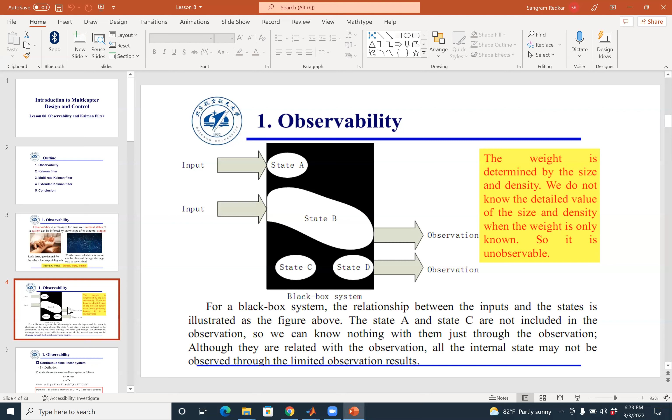For example, if they give you the velocity, you try to find out what the position is. If they give you the acceleration, you try to find out the velocity. By integration, double integration, you can find the displacement.

At minimum, this is the standard form of the continuous time differential equation system. This is the first order representation we studied in Robotics 1, where x dot is the first derivative of state. A is the constant matrix, X is the state, B is the weights on the control input, and U is the control input. Y is the observation, and that observation is somehow related to the state by matrix C. So when we talk about observability, that matrix C plays a critical role.

In the next few slides, I'm going to show you some examples of practical systems where you can observe the system, and where you cannot. So what is the definition of observability?

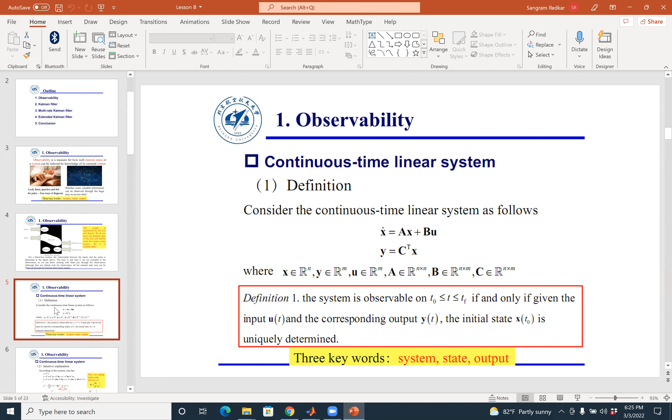I want you to understand something like this. You know y, basically y is given to you. So given y, we have to find x. How do we find that out? y is equal to c transpose x. If you take the derivative, you get y dot is equal to c transpose x dot. But what is x dot? From this equation, x dot is equal to Ax plus Bu.

When you substitute this equation in here, and repeat the process, you get a linear matrix equation. That matrix equation is solvable as long as this matrix has full rank. What do I mean by that? I'll start with a very simple example.

2 oranges plus 1 apple is equal to $6. 4 oranges plus 2 apples is equal to $12. So from here, can you tell me the cost of an orange and the cost of an apple? No, because there are two unknowns, cost of orange and cost of apple, but there is only one equation. Do you agree with me?

If I write this equation in matrix form, remember linear algebra, orange and apple, if you find the rank of this matrix, the rank is going to be 1, but there are 2 rows. So this matrix is rank deficient, and that means these variables cannot be found out.

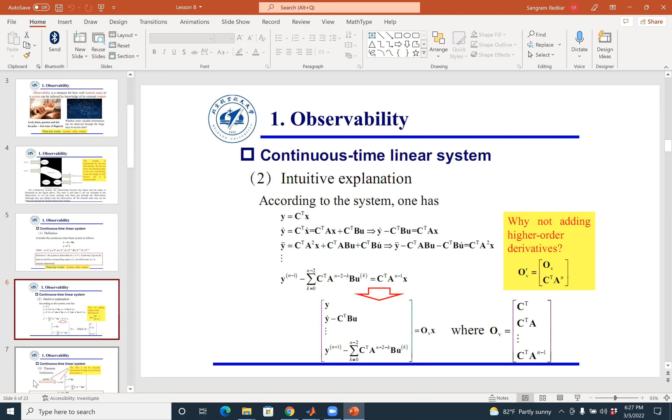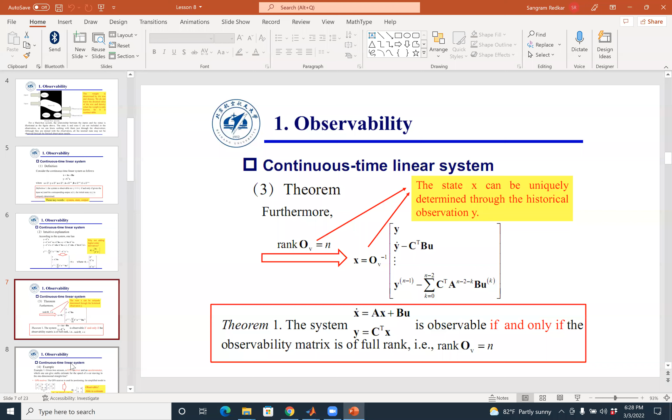Don't believe me? I'm going to show you a practical example, and then a video that will make these concepts clear. This is the basic theorem: the system x dot equals Ax plus Bu, and y is equal to c transpose x. A is observable if and only if that observability matrix, the matrix built from C transpose and A squared, has full rank.

Now let's look at an example. This is a very classic example that is motivating for Kalman filtering and sensor fusion, and this is the example we will see in the videos. Say you have an inertial measurement unit with an accelerometer, and you have a GPS. The GPS gives you the position estimate, telling you where you are. The inertial measurement unit gives you acceleration, and you integrate the acceleration to get velocity. But the output from the inertial measurement unit is noisy. So how do you combine these two measurements, the GPS and the accelerometer, to get an estimate?

Please note, this is not the true measurement, but an estimate for the speed of a car moving in one dimension. The GPS receiver gives us the equation for position. The very simple model is P dot equals 0 1 0 0 times P, and V dot equals 0 times V, plus some type of noise in that measurement. Now the question is: is this system observable?

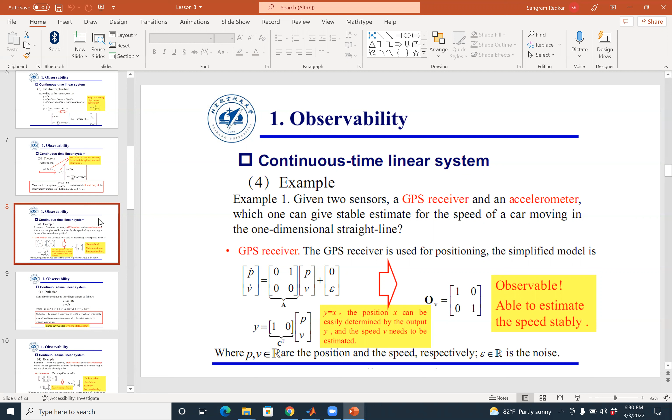The answer is yes, and let me tell you what this means. From a GPS receiver, you know the position. You know the timestamp. After some time, from the GPS receiver, you again know the position and the timestamp. So you have two positions and two timestamps. Can you find the velocity? You can find the velocity. So that's what this equation tells you, that the system is fully observable.

Now here's another problem: you're trying to do the exact same thing with the accelerometer. From the accelerometer, we get total acceleration and time at one point, then total acceleration and time at another point. You may say I can integrate and find the velocity. But this is very important: when you integrate, one important missing piece is the constant of integration.

Do you agree with me? If you're going to find the velocity based on acceleration at time t1 and acceleration at time t2, what would you do? You'd find the difference in acceleration, multiply by the time step, and that gives you the relative change in velocity. But you don't know the initial velocity, which means you don't know what the velocity of the vehicle was when it started. You have the change in velocity, but not the initial velocity, which means you cannot find the total velocity accurately. This means the system is not observable.

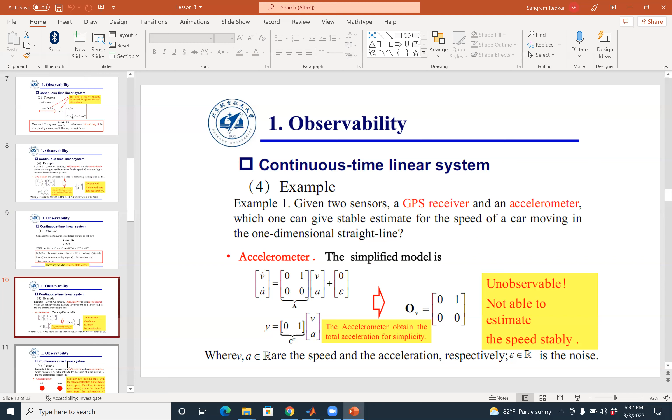If you take a linear systems class, they will talk a lot about this - there will be at least 5 to 6 lectures on controllability and observability. But try to understand, observability means: given a certain observation, can you find the state? That is what observability means. Many times systems are observable, many times systems are not observable.

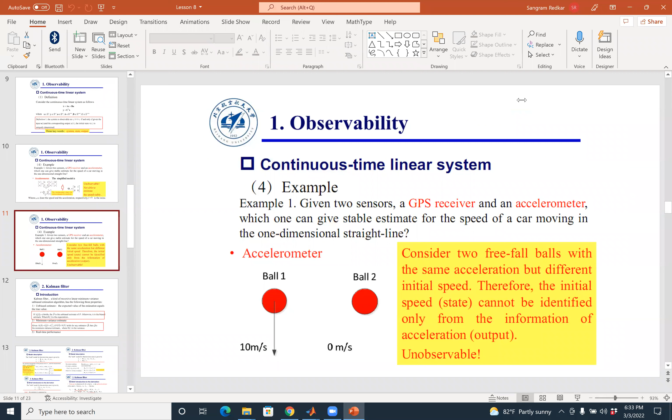Okay, now comes the next part. Once again, a big caution: if you have not seen the Kalman filter before, this material is going to look very alien. Unfortunately, if the Kalman filter is discussed just by equations, it's super complex because it uses Ito calculus, which is stochastic calculus. But in principle, the ideas are super simple.

Fundamentally, we are trying to find an estimate of a certain value. Again, the idea is if you have a noisy signal, how do we find from that noisy signal the best possible estimate? What is the best possible true value? It may not be the exact or accurate true value, but what is the best possible one? Say you have an IMU giving you accelerations, and a GPS giving you positions. The IMU is very noisy, the GPS is also very noisy. How do you combine these two noisy measurements and still find a good, accurate estimate?

For that, you have the concept called the unbiased estimate, which is the expected value of the estimation. And you have something called the minimum variance estimate, which is about minimizing the spread, and running that through some type of optimization criteria, some cost function.

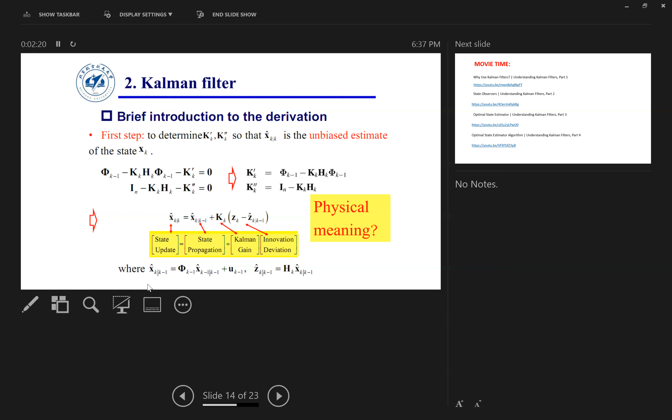And trust me, I've taught Kalman filter multiple times, and it is difficult, honestly, to get a feel for the mathematics of Kalman filter. So what I'm going to do is I'm going to sit back, relax, and play a movie.

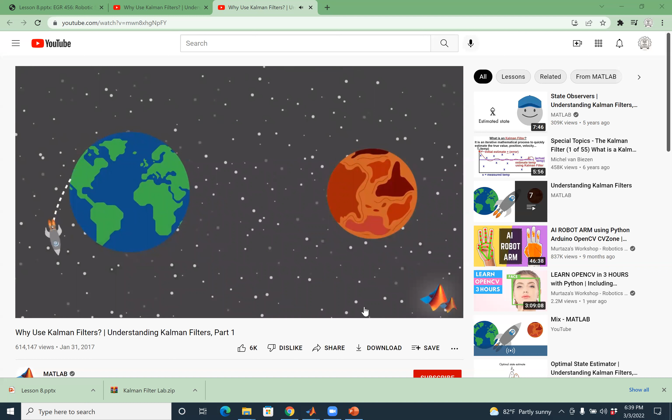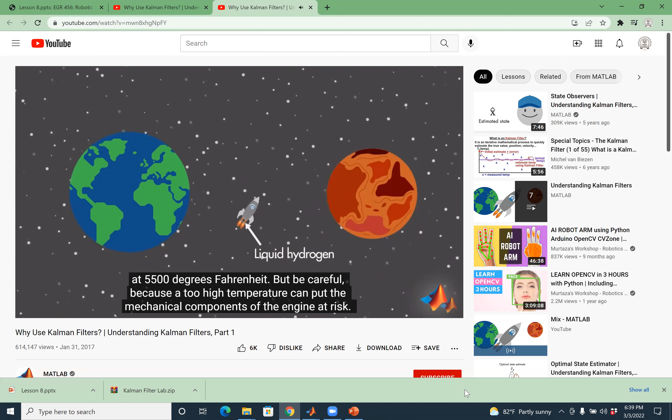If your spacecraft's engine can burn fuel at a high enough temperature, you'll create thrust that will let you fly to Mars. According to NASA, liquid hydrogen is a light and powerful rocket propellant that burns with extreme intensity, up to 5500 degrees Fahrenheit. But be careful, because too high a temperature can put the mechanical components of the engine at risk, and this can lead to the failure of some of the mechanical parts.

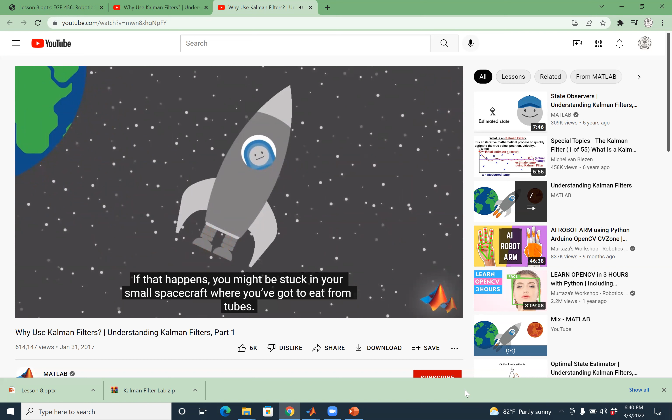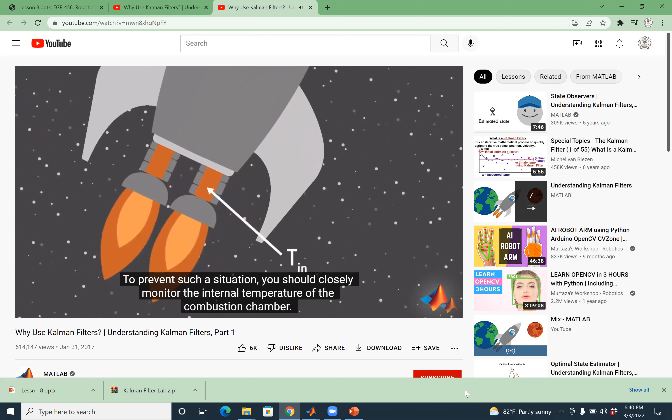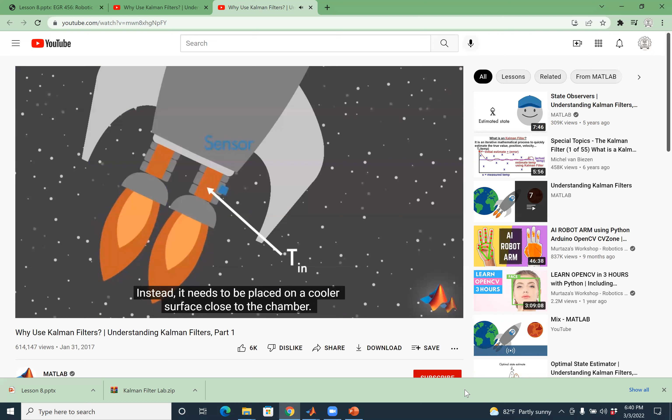If that happens, you might be stuck in your small spacecraft where you've got to eat from tubes. To avoid such a situation, you should closely monitor the internal temperature of the combustion chamber. This is tricky since a sensor placed inside the chamber would melt. Instead, it needs to be placed on a cooler surface close to the chamber.

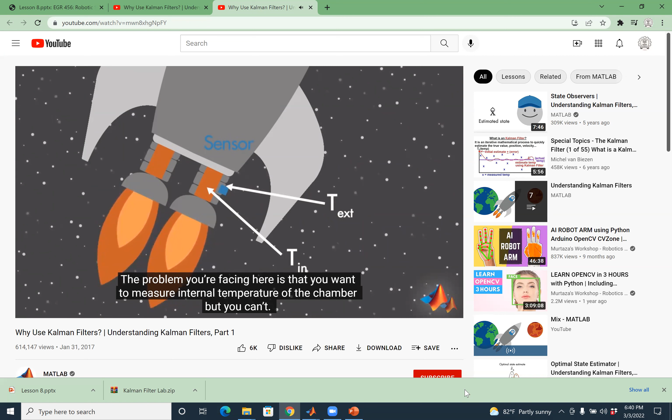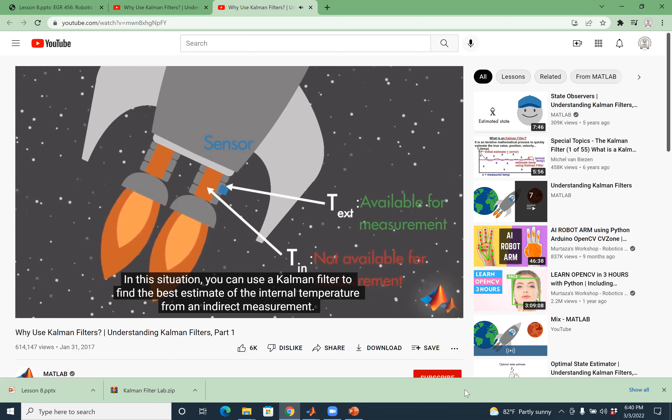The problem you're facing here is that you want to measure internal temperature, but instead you have to measure surface temperature. In this situation, you can use a Kalman filter to find the best estimate of the internal temperature indirectly. This way, you will extract the information about what you can't measure.

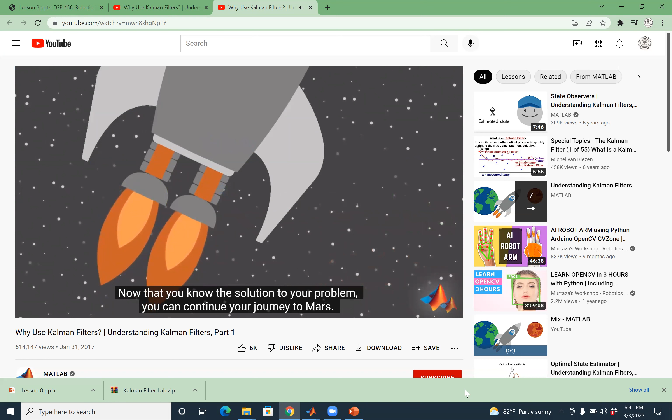Now that you know the solution to the problem, you can continue your journey to Mars, but are you scared? Let me tell you this: on Mars, you're going to weigh 62% less than you weigh on Earth.

So let's go. Okay, now let's go back and take a look at another scenario that takes place on Earth. In this example, we're going to see how the Kalman filter can be used to estimate the state of the system by combining measurements from different sources that may be subject to noise.

You have guests returning from overseas, pick them up from the airport. You're using your car's navigation system. Let's look at the sensors you have on board, which help you find your position and navigate to the airport.

The inertial measurement unit uses accelerometers and gyroscopes to measure the car's acceleration and angular velocity. The odometer measures the distance covered by the car. The GPS receiver uses signals from satellites to locate the car on Earth's surface.

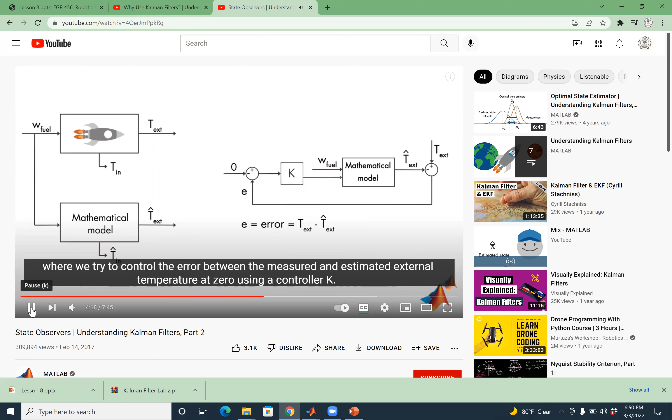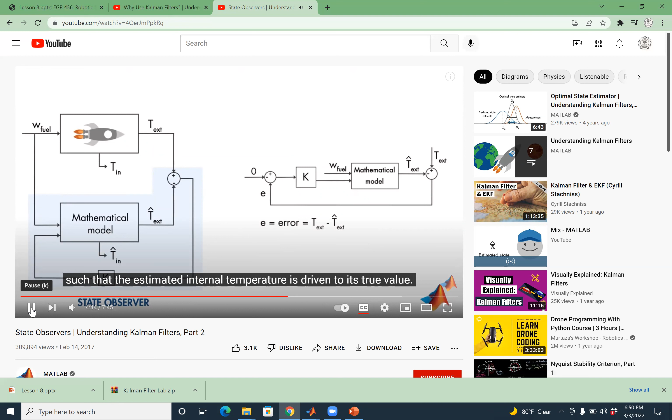Okay. Look for more insight. We'll discuss your findings.

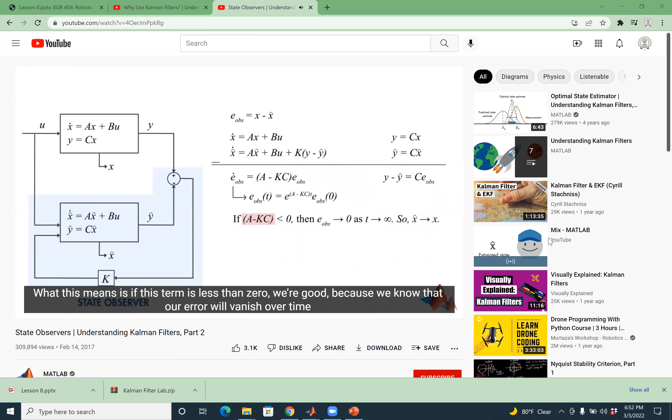Now, did you understand the concept here? What is happening is you have a mathematical model and you have an observation model. What we are trying to do is basically minimize the error between the mathematical output and the observation. Please try to understand that this finally becomes sort of a control system equation.

If you adjust the gain, you can tune it in such a way that what you're observing matches the output of the model. And that is the crux of observation. That is basically what this equation is all about.

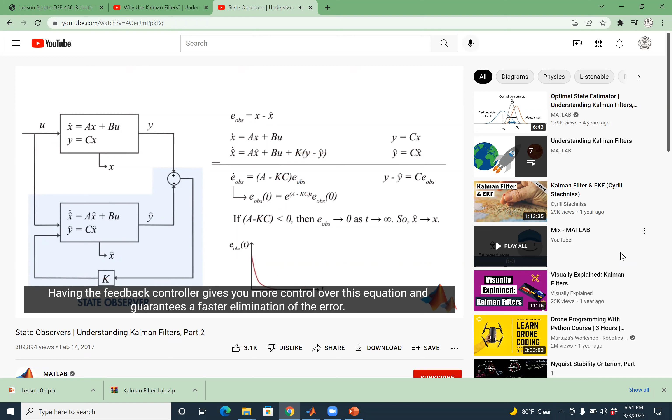In the next video, we're going to start into...

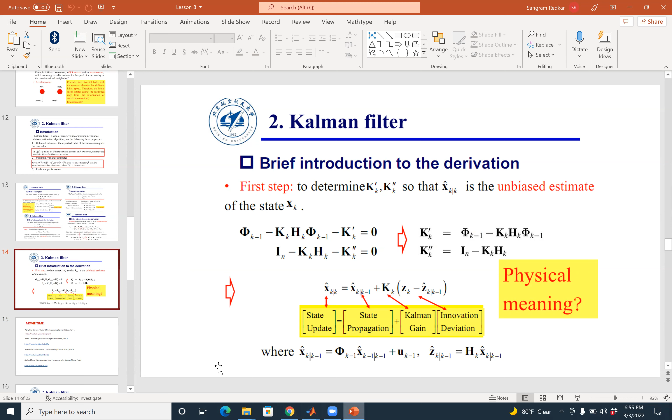So if you like, I can play these videos, and I would very much like to have you watch these videos, like what is optimal state estimator and optimal state estimation filters. You want me to run these videos, or you'll watch those on your own? Personally, I think you can watch them.

But this topic is super important because next lab, this is the crux. You have the estimation from one module sensor, you have estimation, you have measurements, and how do you take these two noisy processes and decrease the variance?

Kalman filtering is a linear approach, meaning the system is linear. What happens if the system is non-linear? When the system is non-linear, what you do is you perform the linearization at each step.

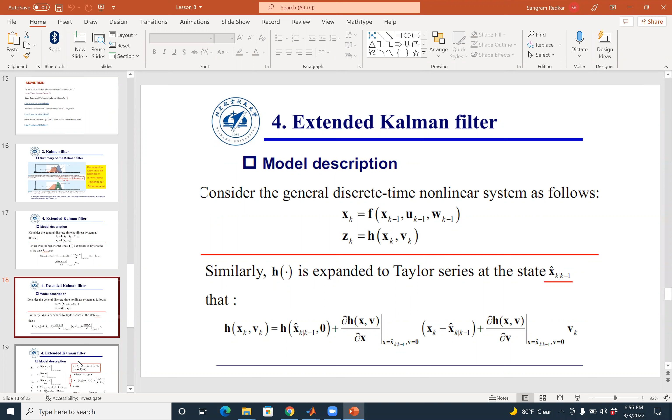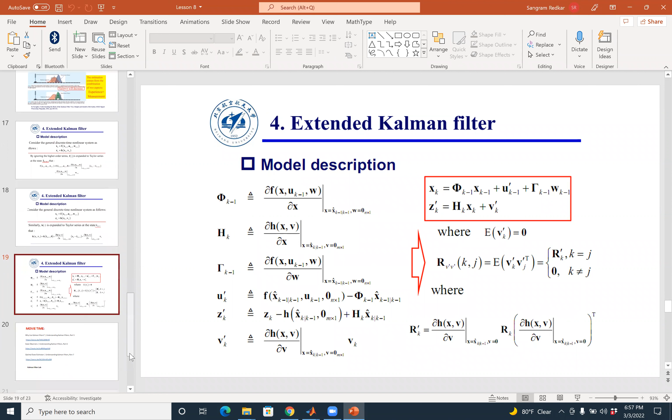So when you perform the linearization each step, what you get is something called the extended Kalman filter. In extended Kalman filter, you have a Taylor series expansion that does the linearization. And if you look at the equations for extended Kalman filter, those are even scarier than the regular Kalman filter. Please note, don't let these equations scare you.

There are excellent movies, part 5, part 6, and part 7, that I would encourage you to watch. They will give you a very nice, intuitive, graphical explanation of what Kalman filter is.

I can derive the mathematical equations of Kalman filter, but to be honest, we are not going to write our own code. In MATLAB, there is a Kalman filter block. We are going to grab that block, feed the inputs to it, and that block will find the optimal estimate.

So we are not going to see how it's working under the hood, but I want you to have a decent understanding of the mathematics of what Kalman filter is, how it works, and everything.

I also recorded an excellent webinar on Kalman filter for my Robotics 2 class students, so I will add the link to that. But these webinars are much, much nicer than the one I did.

So what I want to do now, in the last part of the lesson, is have us do this Kalman filter lab. Online students, what we are going to do in the next 15 minutes or so is the labs.

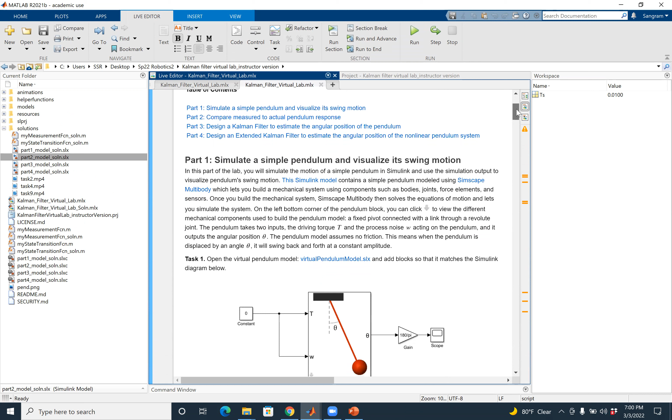That virtual pendulum model SLX is in models. So basically this pendulum model is in the models folder. You can use that model, add the blocks to it, and do part 1, part 2, part 3, and finally part 4.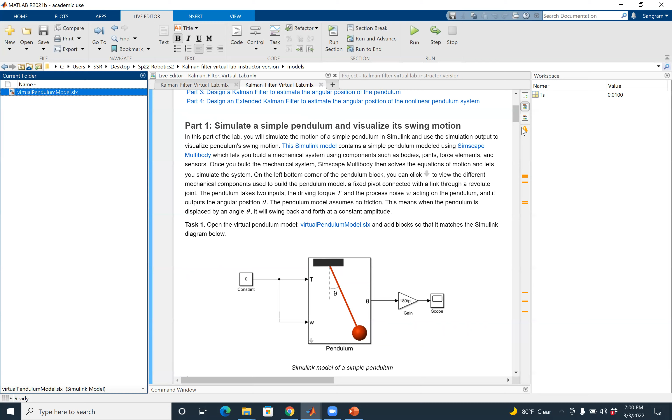Assuming you do these 4 parts, it's actually a very well written lab activity that will make you very comfortable with Kalman filter, its application, like where you would use the Kalman filter. So please start this lab activity.